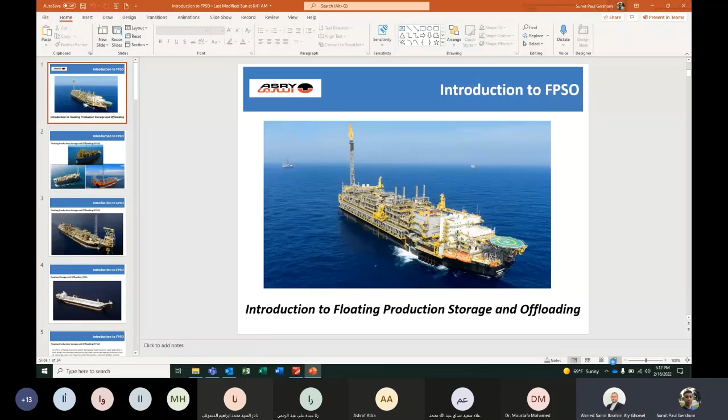Yes, it's visible. It's visible. Okay, fine.

Okay, so today's topic is one of the very interesting topics, which I cannot say is exactly related to marine. It is partly marine and partly offshore. So I'm not sure how much you guys know about FPSO. It is a very unique kind of vessel. So what is FPSO? FPSO is a floating production, storage, and offloading vessel.

Okay, and this is not a regular seagoing vessel. These FPSOs don't do charters or trips from port to port or cargo loading and offloading. These are stationed in one location offshore for years, sometimes even for a straight 20 years in one go. They don't go for docking every 2 years or 5 years. No, they stay in one offshore field for 10, 15, or sometimes even 20 years.

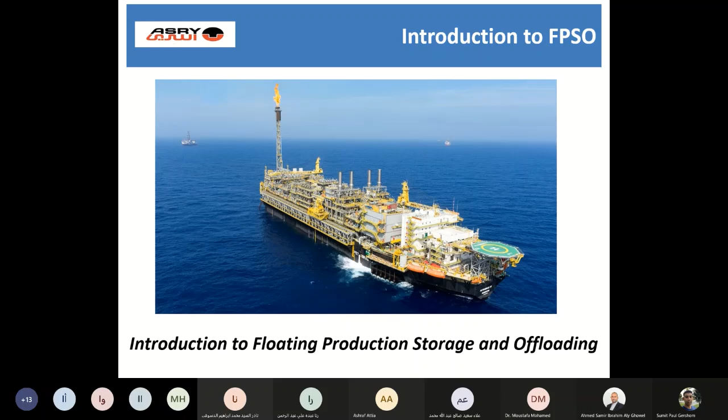Okay, so usually we define FPSOs by the type of mooring system and the type of processing platforms on the top. So as I said, FPSO is floating, production, storage and offloading. So when we say floating, it's already a vessel. We know it floats. Okay, and the second item is production. So you will see on the top you have a lot of production modules or different kinds of production packages. So this is the production.

Then the storage. Okay, the storage is the cargo tanks, which are below the main deck. And offloading is when the treatment or the basic processing is done, it is offloaded to another vessel, which transfers this processed or semi-processed crude to a refinery.

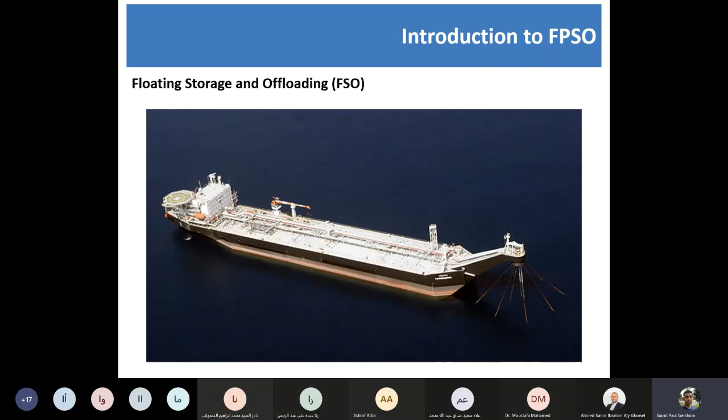This is how a conventional FPSO looks. So the structure at the forward is a turret. And then you can see a number of process platforms on the deck. This is a very typical example of an FSO. So this is floating storage and offloading. This doesn't have any of the process platforms or process modules. So you can see the entire deck is empty. It just looks like an oil tanker with a turret. That's all.

Okay, so what is an FPSO? An FPSO is a floating production system that receives fluid. When I say fluid, it's a mixture of crude oil, water, and other chemicals or gases or produced water from the well, from a subsea reservoir through the risers, which then separates the fluid into crude oil, natural gas, water, and impurities within the topside production facilities on board.

So the modules on board the vessel do all this operation. They separate the crude, the natural gas, and water and other impurities if there are any. Then this crude is stored in the storage tanks of the FPSO and is offloaded to a shuttle tanker. Okay, most FPSOs and FSOs are ship-shaped and can be secured to the seabed via a variety of mooring systems, the choice of which is determined by the specific environment.

Okay, so as I was saying, for an FPSO, there are two very important deciding factors. One is the mooring system and one is the process platforms: what kind of process platforms are present on the deck. And as I was saying, some FPSOs can stay in one location for 20 years or longer.

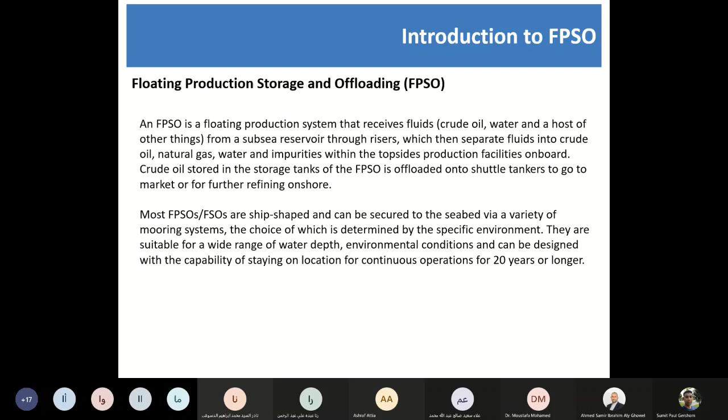Sumit, my screen is not moving. Is it only me or anybody else? For you only. Same? It's clear for us. Okay, Sumit. So sorry. Proceed. Okay. My network. Okay.

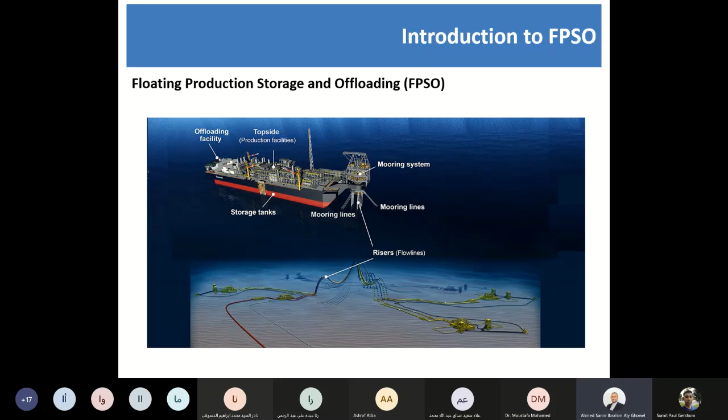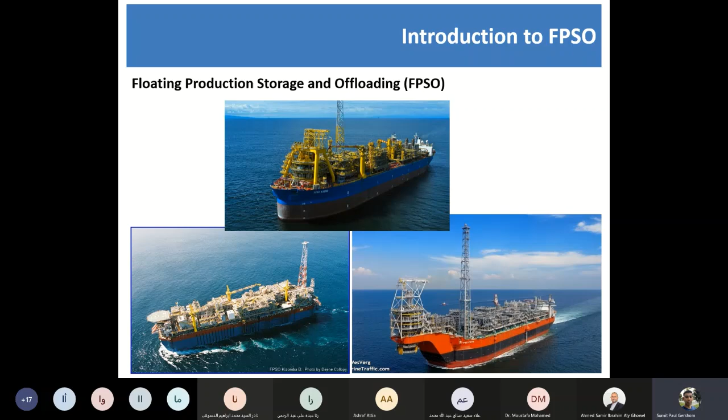Okay, so the three different kinds of FPSOs that we have, as I said, are internal turret, external turret, and spread mooring. So this is what an internal turret looks like. So when I say turret, this entire structure is called a turret. Or even in this left bottom picture, if you see this entire structure, which looks opaque, is a turret.

So what is a turret? Okay, I believe you guys will be knowing what a DP system is, dynamic positioning. You must have heard DP0, DP1, DP2, DP3. Okay, those kinds of vessels. So this turret does exactly the same job as a DP, but in a much simpler way. Here in these kinds of vessels, there is no DP at all. So how does a vessel stay in its position? This acts as a very simple mechanical bearing, and this turret is moored to the seabed, and it allows the vessel to go around the turret.

So there are some parts which I will show. You see there is a main bearing at the top and there is a lower bearing at the bottom. And there are the chains which are connected to the seabed, which are moored to the seabed. And then the risers. These risers are coming from the seabed, which bring in the oil.

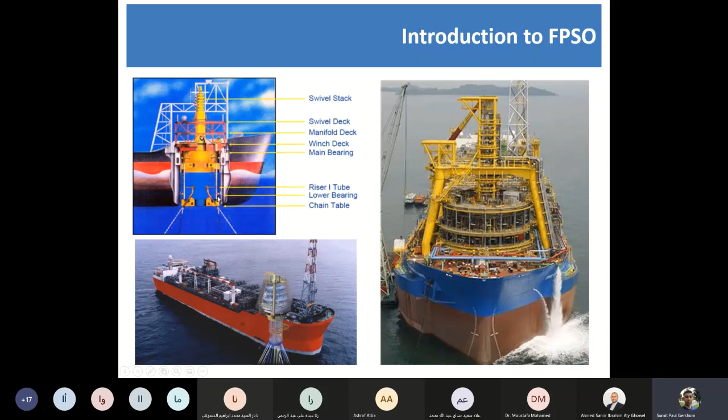So the internal turret is integrated into the bow end of the vessel and is supported on a large bearing arrangement inside the moon pool. So as I was saying, there is a main bearing, and this cutout section is called a moon pool. Okay, the internal turrets are able to support a large number of risers from the seabed. So these kinds of turrets are only installed when comparatively a large number of risers are coming from the seabed to the vessel.

And also the second important criterion is that an internal turret can be used in deep waters and mostly for severe environments where you have waves up to 18 meters. So the internal turret is mostly used where it is a harsh environment and when the number of risers is much higher.

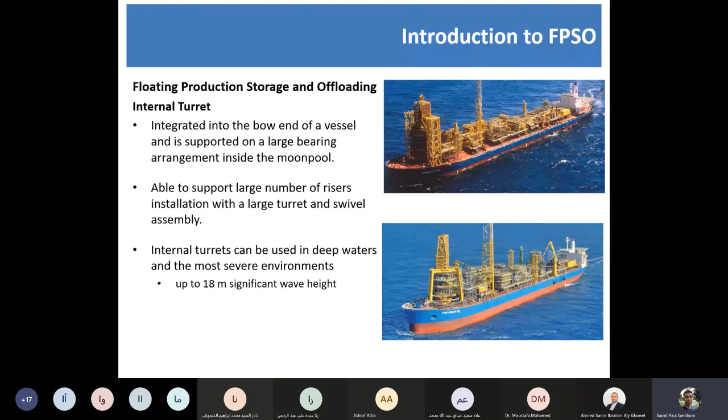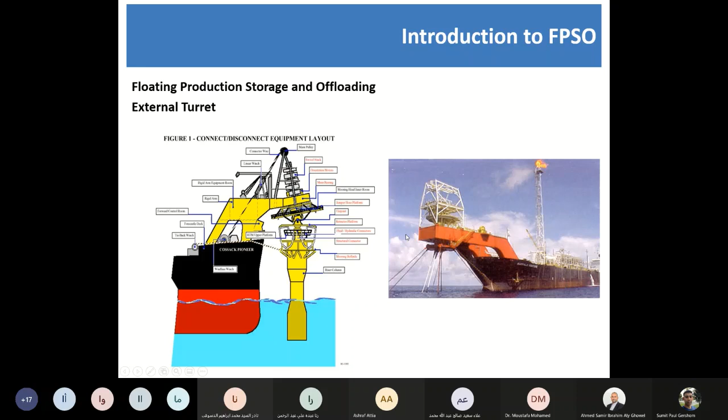Then we have the external turret. So this is how a regular external turret looks. External turret is a steel box structure extending some distance from the bow of the vessel, providing a foundation for a rotating bearing arrangement and a turret structure located above the water. Okay, this is suitable for wave heights about 12 meters. So the external turret is used for average waters where it is not too harsh and not too calm, and it can support a very limited number of risers from the seabed.

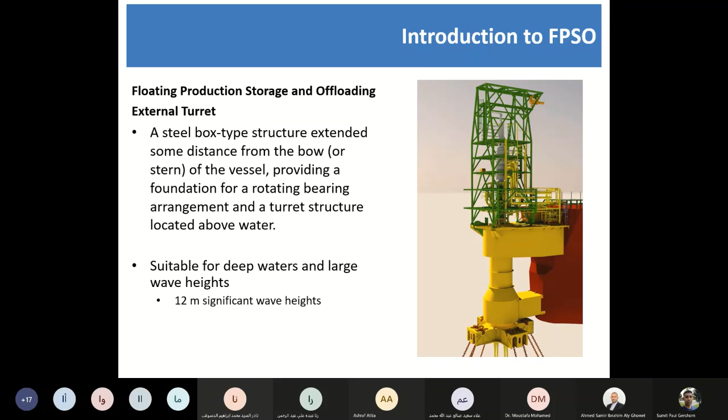So this is also the external turret mooring. You can see in the picture here. There are chains which are connected to the seabed. This is the mooring, and then there are the risers in orange. These are the production risers which are coming to the vessel.

So when I keep saying turret, what is a turret? A turret on a vessel is moored to the seabed and at the same time allows rotational movement of the vessel, which we call weathervaning, through the integrated rotating part in the hull. So as I said, this allows the vessel to move around it no matter what, whether it is the wind or the waves or the current. So the vessel stays in the same position, it just moves around this turret.

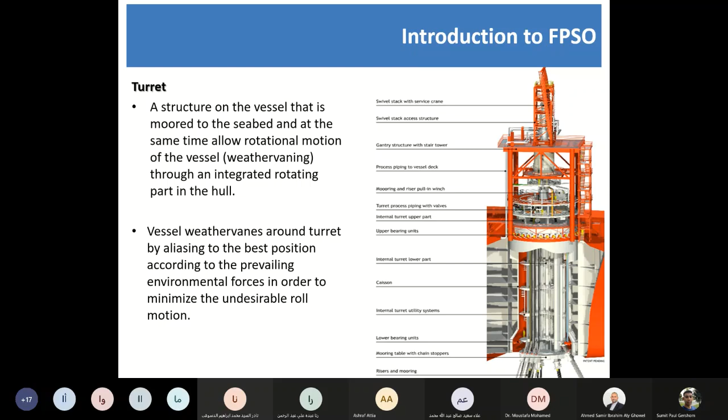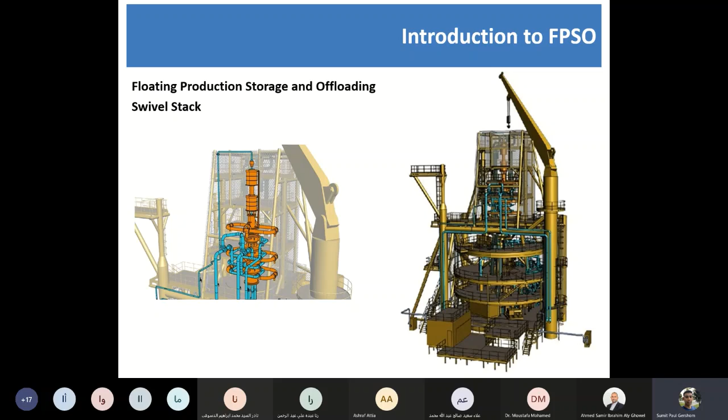And this is a swivel stack. This is a very important part of the turret. Okay, this is an entire turret, and the top section of this turret is a swivel stack. What is the role of a swivel stack? This picture will show a display of a swivel stack. So whatever oil or gas is coming from the risers, when the vessel is moving around or rotating around the turret, this swivel stack makes sure that the risers are not getting entangled or messy.

The reason for that is it works very similar to hydraulics on a crane or a JCB, where a crane can do a slewing operation in 360 degrees without stopping, because the oil keeps on passing from the pipes to the necessary equipment or winches. It works on almost the same principle: it receives the oil or gas from the subsea and passes it to the topside modules without interruption. So the vessel doesn't have to come back to its location and the risers don't get entangled.

Mr. Sumit, can I ask a question? Sure. When we use the turret, are there any anchors at the end of the chain? Yes, sir. There is an anchor, but that anchor system is also a very vast topic. There are a number of different types of anchors. Some are pile type anchors or some are suction anchors. These are not regular drag anchors, mostly for internal turrets and external turrets.

The clients or the big companies like Shell, BP or ExxonMobil, these guys will be working on these kinds of vessels. So they go for suction anchors mostly. Suction anchors are a very simple concept. They are big tubulars which are erected on the subsea, and then the water is pumped out from the tubulars, so they self-penetrate into the seabed.

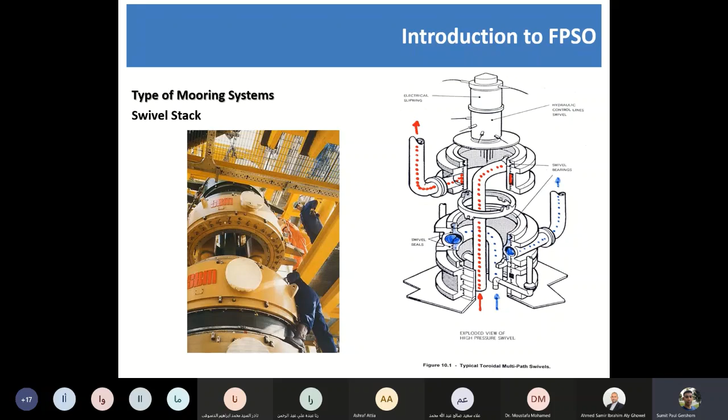So this is how a swivel stack looks like. The swivel stack is a toroidal swivel system installed on the top of the turret that allows continuous transfer of fluids from the well to the platform, that is export, with uninterrupted power and control also. So everything goes through this to the subsea, or everything comes from the subsea through the swivel stack.

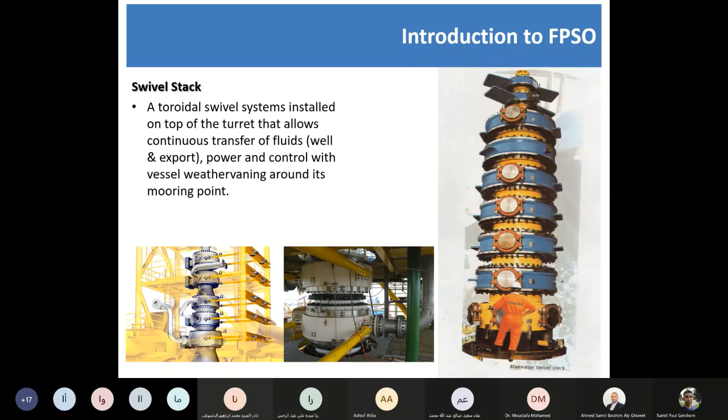Then there are some mooring systems or turrets which are detachable or disconnectable type. As I was saying, the internal and external turrets are for harsh and average weather conditions. But there are some cases when the weather is getting worse. Some of the FPSOs working in the North Sea or Gulf of Mexico plan that during harsh conditions they should be able to move quickly. In those vessels, we have to go for a disconnectable turret.

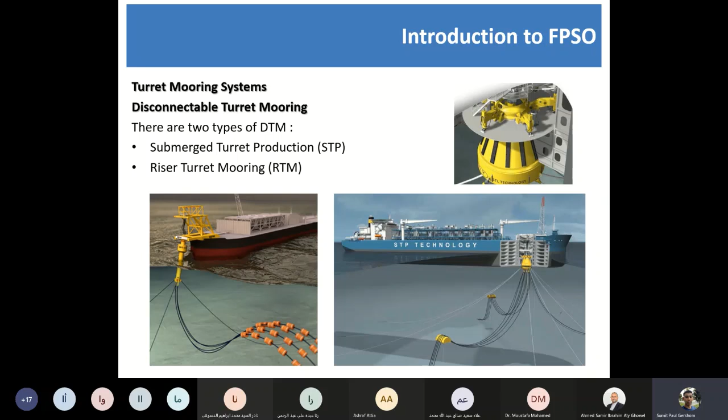So this is how a submerged turret production looks like. You can see that this turret is detached in the right hand side picture, and it is just floating below the water, and it can be easily reconnected. Submerged turret production consists of a buoyancy core and integrated turret, which provides the required buoyancy to the attached risers and mooring lines so that when disconnected from the mating cone, it will float in an equilibrium position of 30 to 50 meters below surface.

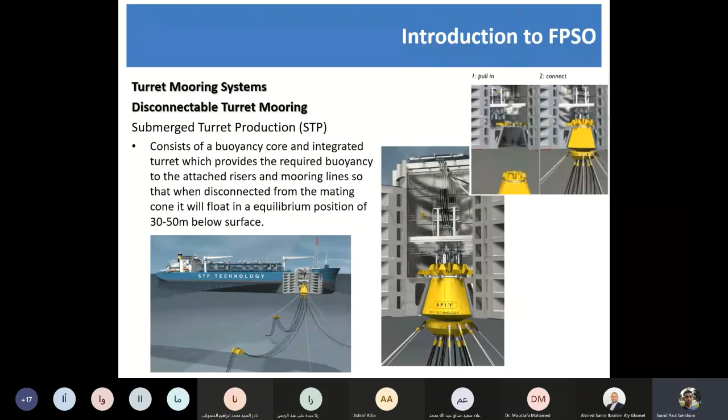So in this case, the turret is still moored to the seabed and the risers are still connected, but it is disconnected from the vessel. The vessel can move from the position and come back after the storm or when the weather condition is fine. This is the riser turret mooring. This is also similar. It can be disconnected and easily reconnected after the vessel is in place.

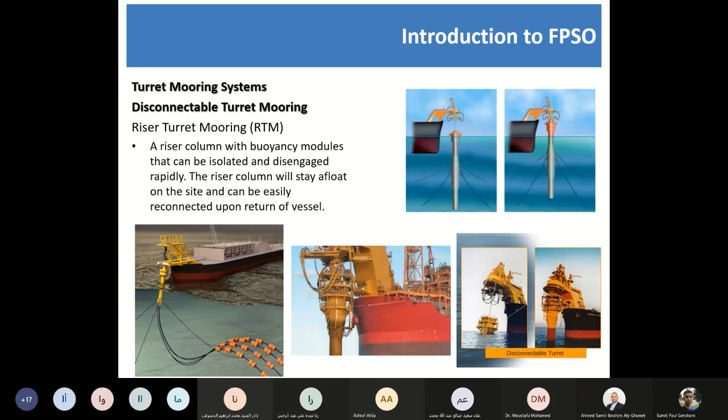The next one is a spread mooring system. The spread mooring system does not require any kind of turret, and this is for ultra calm waters. This is mostly in Nigeria or South Africa, where we have calm waters. So most of the FPSOs are spread moored in those locations where we don't need a turret.

Mr. Sumit, one question please. These connection lines are connected by divers, correct? It is not connected by divers. 99% it will be connected by ROVs. Okay, ROVs. So these are commercial? Yes. Not divers.

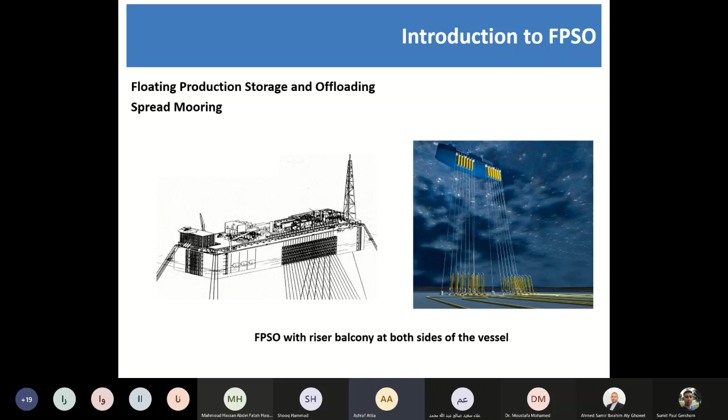Yes, that is one reason that will keep it in position, all the risers and all the mooring systems. But these kinds of FPSOs are only located in those areas where the water is extremely calm. You don't expect any big waves or current flow. Okay. But in case of a turret, we have a possibility of rotation, right? Yes, right. Okay.

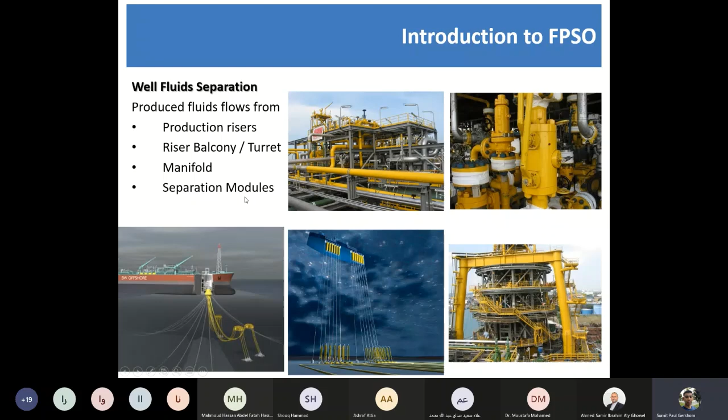Okay, so well fluid separation. As I said, these are the production risers which are coming from the seabed, bringing the oil to the turret. And then we have the turret, the riser balcony, where the oil comes in. This is the turret and the riser balconies are here. And then we have the separation modules, where the processing takes place. So this is how a regular FPSO looks like, or how we classify it.

On an FPSO, on the deck, you will have a number of production modules. These production modules can be very different from vessel to vessel because it is decided by the field, what kind of treatment or processing that particular field requires. So this is purely based on the study of each oil field, and it can be different from FPSO to FPSO. But there are some very basic modules or process platforms which are always there in all FPSOs.

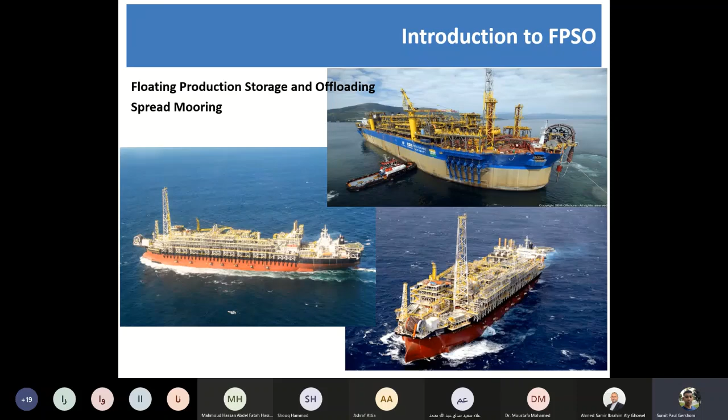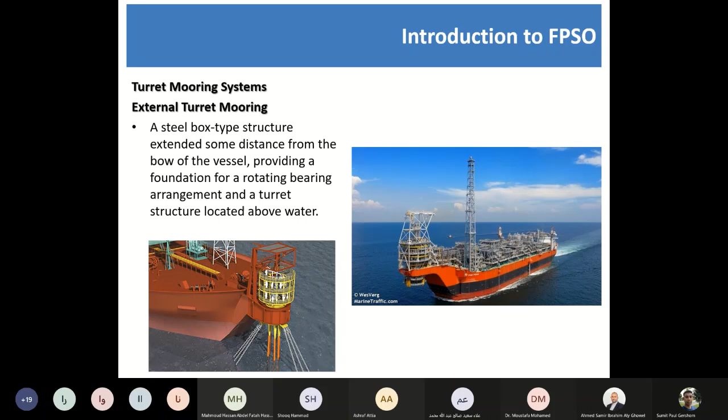So this is used for flaring the gas that cannot be converted or that cannot be used. So it is flared to air and it is burnt off. So this is mostly at an angle. On this vessel, it is straight, but on most of the vessels, this flare boom is at an angle. It is very difficult to install this.

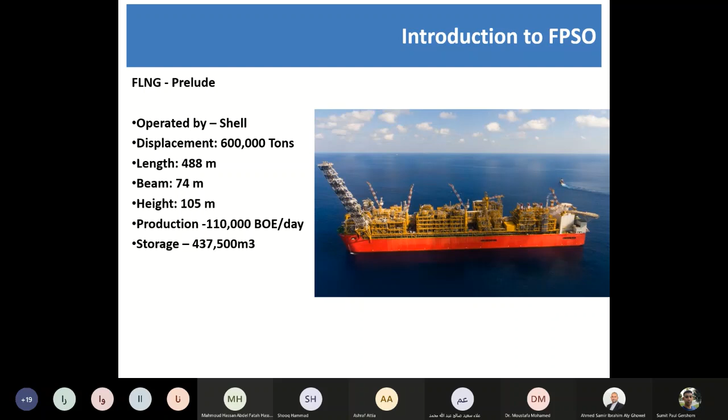These are some of the photos of the same vessel. You can see the flare boom. This is at an angle. And this consists of an internal turret. You can see in the bow area, this is the internal turret. And this turret is the biggest turret in the world so far. This weighs around 8,000 tons. Same, it's Shell Prelude. Few pictures.

And for the spread mooring, this is the biggest FPSO with a spread mooring that is available today. The vessel is Egina. It is operated by Total. The length is 330 meters, beam 61 meters. The displacement is 499,900 tons. The production capacity is 200,000 barrels per day, and the storage is 2.3 million barrels.

You can see on the bottom picture, on the entire hull, from the forward to close to the accommodation, everything is a riser balcony, so it receives a massive amount of oil per day. And as I was saying, this is the biggest FPSO with a spread mooring that is moored to a seabed with a depth of 1,600 meters.

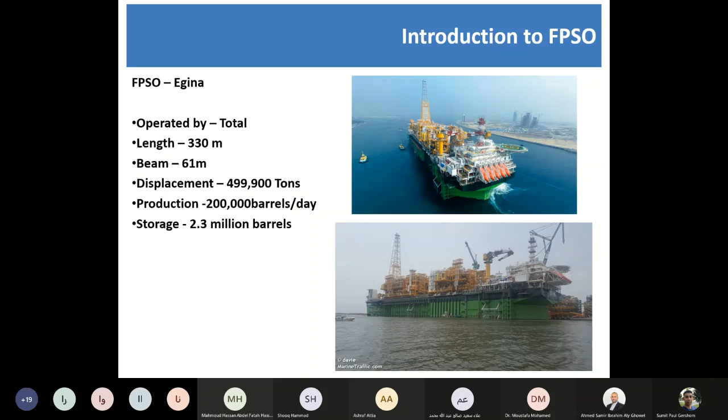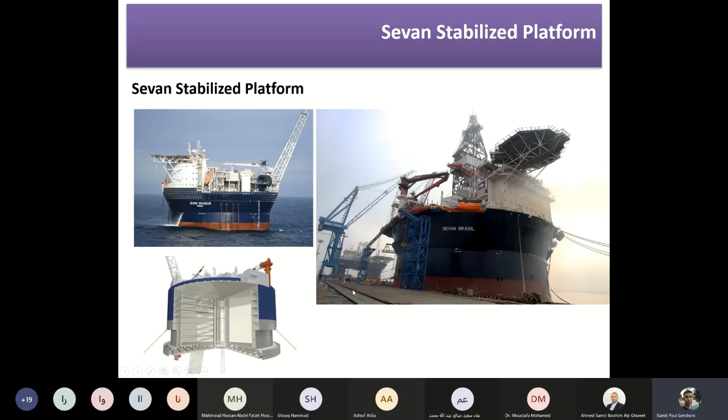And the next topic I want to share with you is very interesting for students, especially when I was one. This is a very interesting concept, SSPs, Sevan Stabilized Platforms. There are very few in the world which are built, and it is extremely expensive to build these. These kinds of vessels, there are very few in the world, and they have different kinds of vessels. Some are FPSOs; you will see this is an FPSO.

And why I'm saying there are very few and it is very difficult to manage these kinds of vessels is because of the diameter. This is a very unconventional shape. It is exactly round or cylindrical. So there are only few docks in the world which can accommodate these kinds of vessels. The diameter of this vessel is around 80 to 120 meters. There are few different sizes, so it starts from 80-meter diameter to 120 meters. So there are very few dry docks who can accommodate them.

And the purpose of this design is the most interesting concept, because this doesn't need a turret. This is also working on the spread mooring system, but much less mooring is required because of its shape. It is exactly cylindrical, so it doesn't have much effect of waves or winds or tides.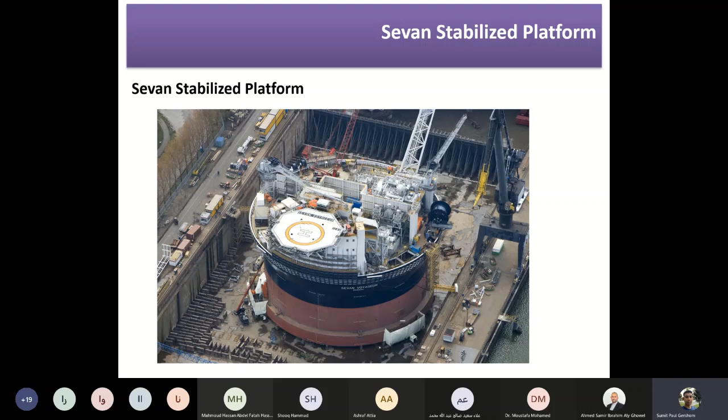So there are few SSPs available. There are few FPSOs available, few MODUs, Mobile Offshore Drilling Units. There is one FLNG, and if I'm not wrong, there is one FDPSO only. I don't think there is any GTW or FAU or MSVs built so far. So this is more of a concept design, and there are very few of these in the world. So mostly that's all from my side. Any doubts or any questions?

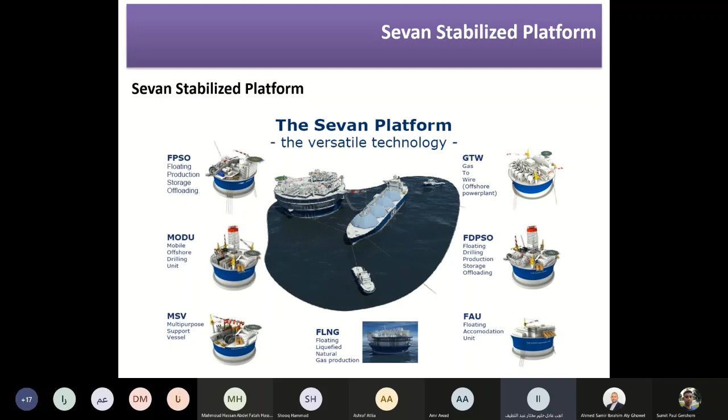Okay, the main function of flare boom. So when I was saying there is a gas compression or gas treatment system on board the vessel, there will be some gas like methane. Sometimes you have methane or there are few other gases which you cannot convert to something else and you have to flare it or you have to waste it. So there are some ways of using those gases. Some vessels you can burn it off and produce energy, but some vessels you cannot. So in these kind of vessels, you cannot use it anywhere else, so you have to flare it.

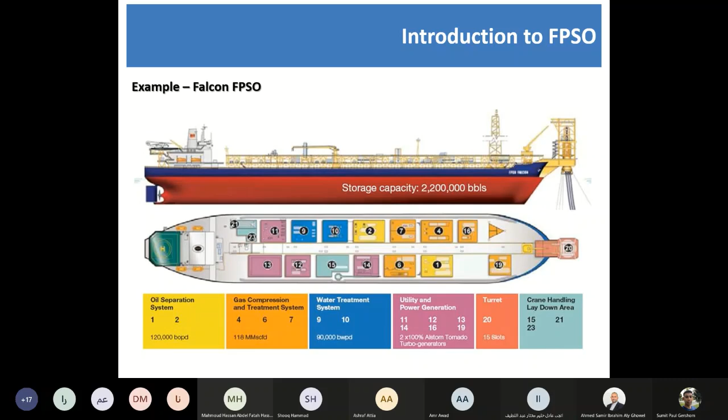So on these vessels, you have something called flare knockout drum. So this is the last one which starts the processing of final separation of this waste gas, and then it is flared through the flare boom. So this gas is the only gas which cannot be used for anything else, or which cannot be stored for any kind of useful purpose.

Okay, thank you. Sorry, the position of turret is always in the forward of the ship? Most of the designs, yes, it is only in the forward of the ship. It's either internal or external, because that is the most suitable place for a vessel in case it wants to weather vane, if it wants to rotate along its axis. If one of you is a designer, you can try it on some design software, and I believe this is the most suitable one. Instead of having it at the midship, where you will have equal stresses or force from both forward and aft, it's more sensible to have it on one corner and let the whole vessel move around it.